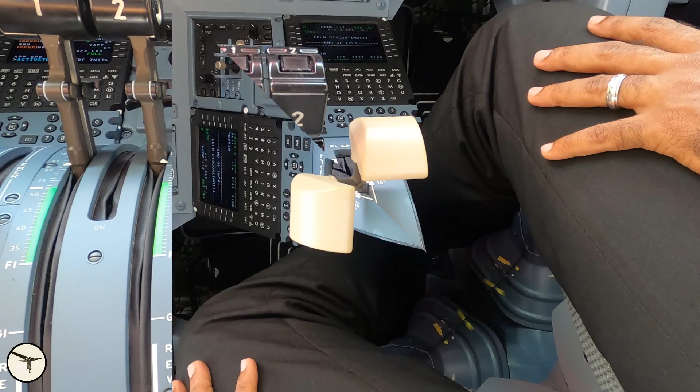The preliminary report for the accident for Yeti Airlines 691 has just arrived, and it's really sad to read the story behind this.

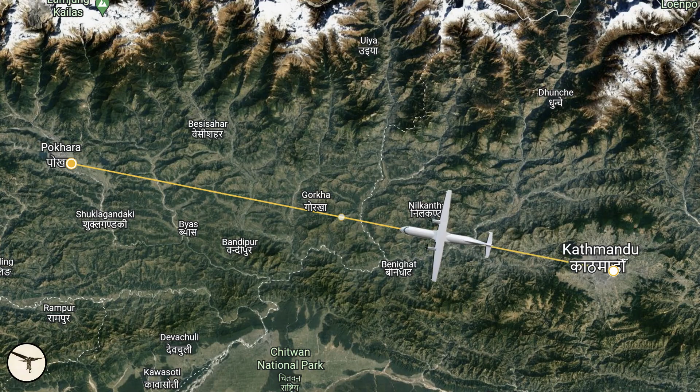The accident happened with Yeti Airlines on 15th of January 2023. This was a flight from Kathmandu to Pokhara airport, a brand new airport opened only 2 weeks before the accident. The old Pokhara airport is located just a few nautical miles to the west of the new airport.

The flight from Kathmandu to Pokhara is very short, and it will be natural to land on runway 30, because that means you will fly straight in.

On this flight there were 2 captains on board. One captain was doing familiarization training. This captain sat in the left seat and was pilot flying. In the right seat was an instructor who was then supervising the flight.

As they got closer to Pokhara and got in contact with the tower, they were told that they will be given an approach to runway 30. But instead they asked for a visual approach to runway 12 in the opposite direction, which was granted.

The weather was very good, very light winds, 3 to 5 knots, good visibility and just a few clouds.

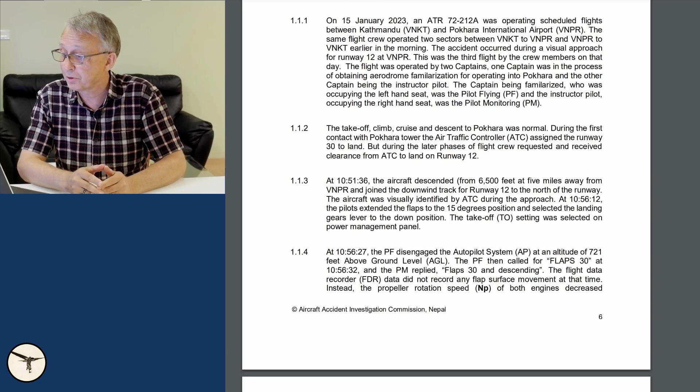According to the report, in section 1.1.3, at 10:56:12 they extended the flaps to 15 degrees position and selected the landing gear down. At 10:56:27 the pilot flying disengaged the autopilot at an altitude of 721 feet above ground level.

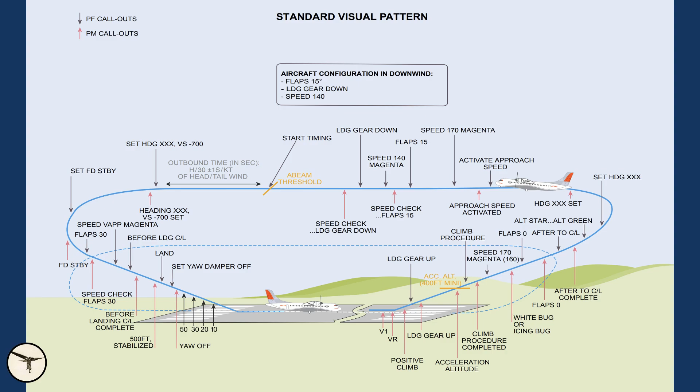Flying a visual approach at this altitude is a bit low, but there might be some reason for it. A standard visual approach is flown at 1500 feet above the airport.

The pilot flying then called for flaps 30 at 10:56:32, and the pilot monitoring replied flaps 30 and descending. The flight data recorder data did not record any flap surface movement at that time.

Instead, the propeller rotation speed, NP, on both engines decreased simultaneously to less than 25%, and the torque started decreasing to 0%, which is consistent with both propellers going into the feathered condition.

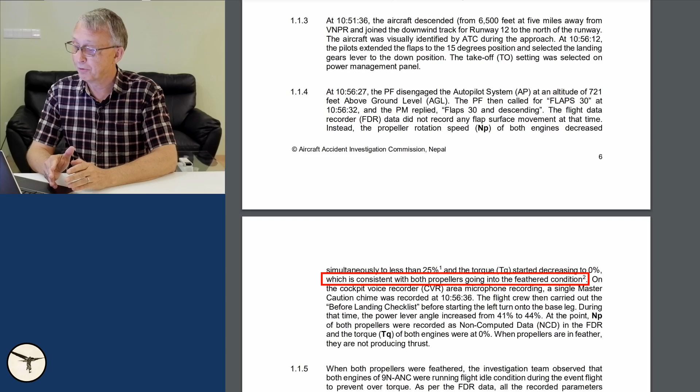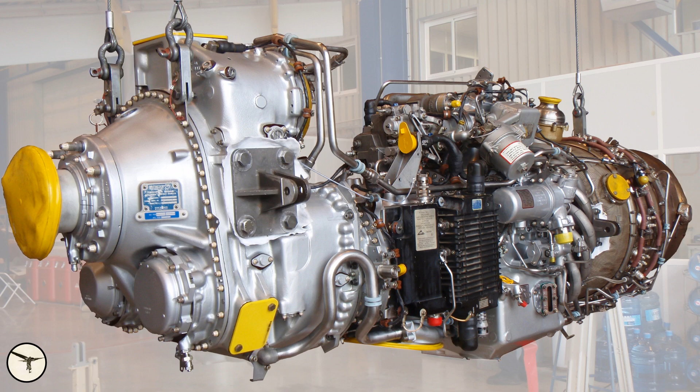The flight data recorder cannot register rotation speed below 25%, which means it can be anything from 25% down to 0%. Before we continue, let me give a brief description of the engine.

If you want to know more about the engine and how it works, you can watch those videos. The core of the engine is a low pressure shaft with a compressor and turbine, and a high pressure shaft with a compressor and turbine.

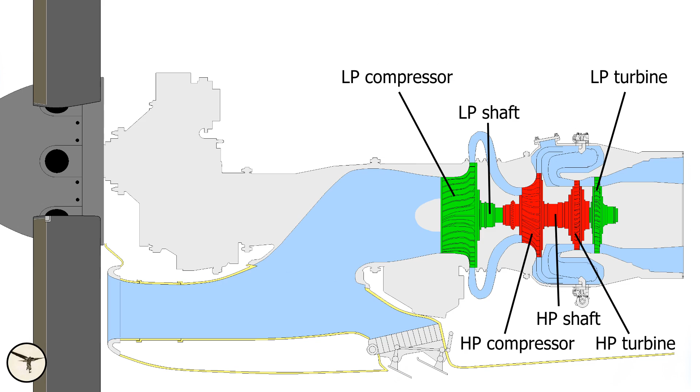Those shafts rotate independently of each other, and the rotation speed is shown as NH and NL. 100% NH is about 40,000 RPM.

The compressors squeeze the air and send it to the combustion chamber, where fuel is mixed with the air and burned. This gives energy to drive the compressors, and we call this a gas turbine.

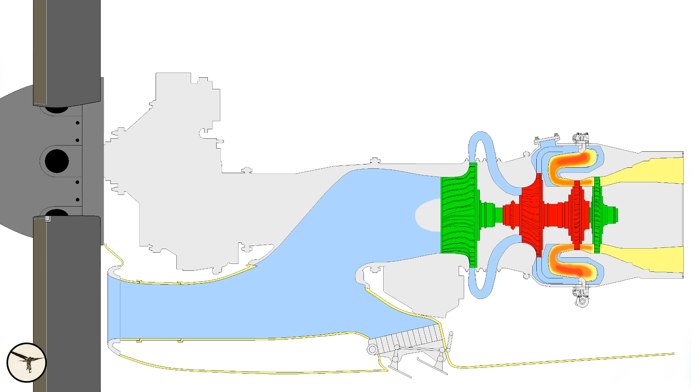The gas turbine drives a DC generator, which provides power to many of the systems in the aircraft. Then we have a third turbine called a free turbine. It is connected to a reduction gearbox and a propeller.

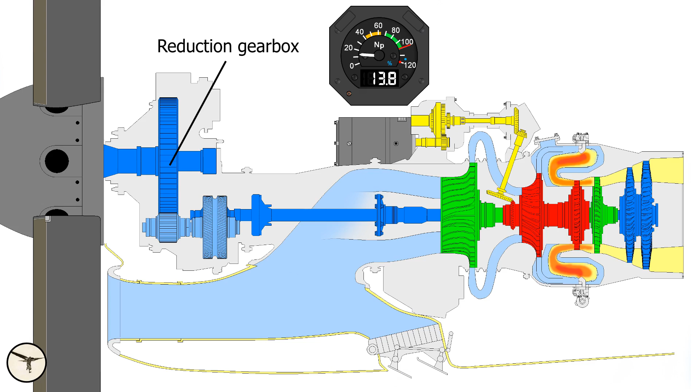The rotation speed is shown as NP, and 100% is 1200 RPM. An AC generator is attached to the gearbox.

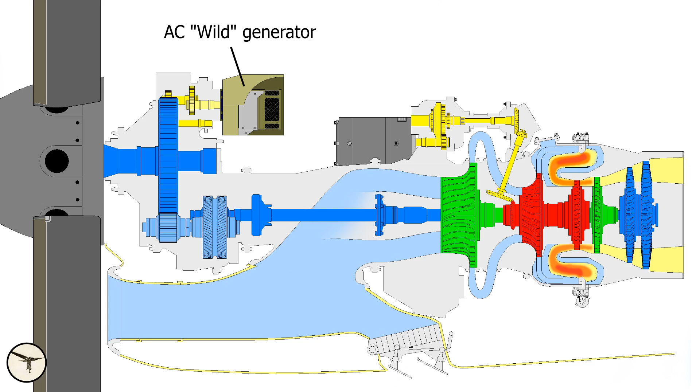Since the propeller rotates with variable RPM, the generator produces AC power with variable frequency. Therefore, the generator is called an AC wild generator. The AC generator is online when NP is more than 65%.

For example, after landing, when we are taxiing in, we will feather the propeller and NP will drop down to about 14%. That means the AC wild generator will go offline.

The torque indicator is the primary indication for the power of the aircraft. The power is defined as torque multiplied by NP.

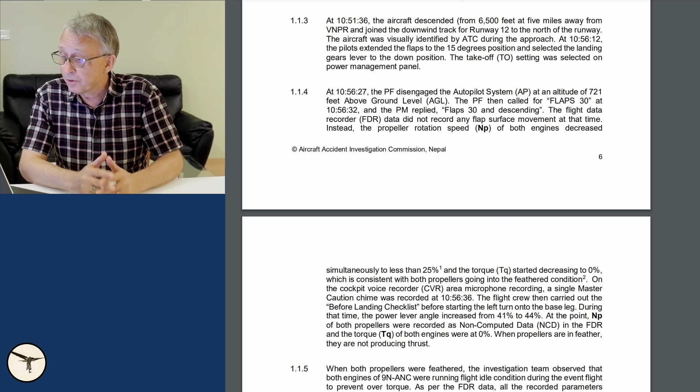On the cockpit voice recorder, the microphone recorded a single master caution chime at 10:56:36. I assume this chime was triggered because the AC wild generators went offline.

Those generators are powering the hydraulic pumps and some ice protection systems like the windshield heating and pitot heat. So they should get 3 alerts on the crew alert panel: for electric, for hydraulic, and for anti-ice.

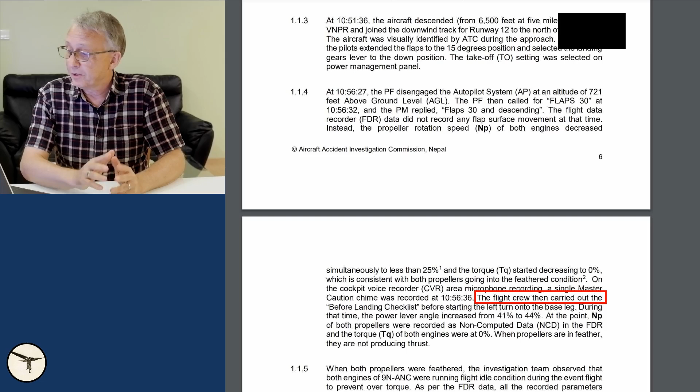The flight crew then carried out the before landing checklist before starting a left turn onto the base leg. On that checklist, you check that you have flap set for landing.

Apparently, both pilots missed that point, which means they didn't check the flap indicator properly, because it should have been at 30, but it was at 15. The report doesn't tell exactly what was said between the pilots. We must have to wait for the final report for this, I assume. It only mentioned a few comments by the pilots, but we don't know exactly what was said.

At 10:56:50, when the radio altitude call out for 500 feet was annunciated, this is an automatic call from the radio altimeter, another click sound was heard.

A click sound can be quite a lot of different things. It can be the movement of a lever, like the flap lever. It can be condition levers. It can be a switch, like the taxi takeoff light switch. So we don't know exactly what that click means.

The pilot flying consulted the pilot monitoring on whether to continue the left turn, and the pilot monitoring replied to continue the turn, which means both pilots had a lot of focus out of the window. It's possible that the flying pilot had never flown this procedure before, since it's a new airport, and this was a flight with an instructor. Which means you have a high workload, because you have to find some landmarks you can use as a reference for later flights. So therefore, I understand why the pilot made this question.

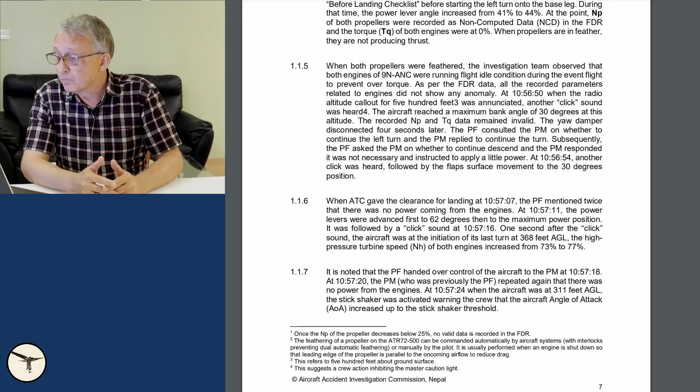At 10:57:11, the power levers were advanced first to 62 degrees and then to maximum power position. It was followed by a click sound at 10:57:16. One second after the click sound, the aircraft was at the initiation of the last turn, that means this turn from base to final, at 368 feet above ground level.

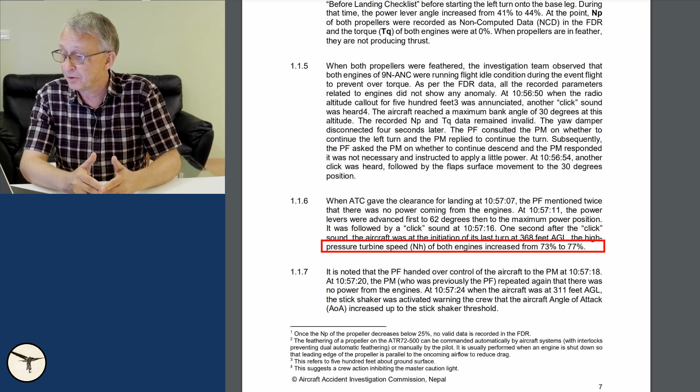The high pressure turbine speed, NH, on both engines increased from 73 to 77%. When the propeller is feathered, the gas turbine continues to run at idle power, and moving the power lever doesn't change that very much. The gas turbine continues to drive the DC generator, which supplies power to all the instruments, so everything appears normal, except for those orders that were already given.

It's a bit strange that they didn't understand what happened. I think the workload must have been too high because of the focus on what's outside the window. And I think pilot flying must have started to struggle to keep the aircraft flying, because without power, you're losing altitude. It is noted that the pilot flying handed over control of the aircraft to pilot monitoring at 10:57:18.

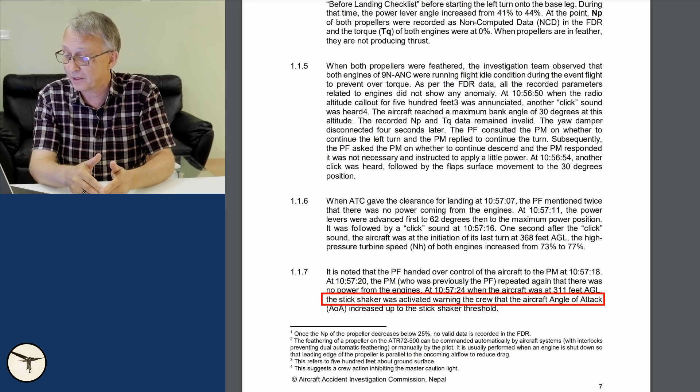2 seconds later, at 10:57:20, the pilot monitoring, who was previously the pilot flying, repeated again that there was no power from the engines. At 10:57:24, when the aircraft was at 311 feet above ground level, the stick shaker was activated, warning the crew that the aircraft angle of attack increased up to the stick shaker threshold. That's an alert before the aircraft is stalled.

And shortly after, the aircraft stalled, the left wing flipped, and the aircraft crashed a few seconds after this. There were 72 people on board, and all of them perished.

The accident report indicates very strongly that both condition levers were moved to feather instead of the flap lever being moved to flap 30. I find it unbelievable that this even could happen, because the flap lever is shaped like a wing, while the condition levers are more squared, and there are two of them. To move the flap lever, you have to put your hand over it, grab one side with the thumb and the other side with the other fingers, lift it up, and then move it.

To move the condition levers, there is a trigger lever underneath each one. You have to put your hand over the condition levers and put two fingers, one on each trigger lever, lift them up, and then you can move the condition lever. It's unbelievable for me that this even could happen.

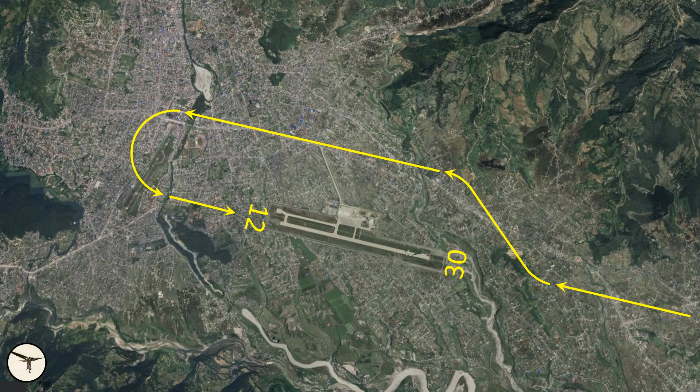The role of the pilot flying is to fly the aircraft. On a visual approach, the airport will be on the flying pilot's side, so the pilot can easily see the runway all the way through the maneuver. But the pilot monitoring will have less visibility towards the airport because this pilot is sitting on the other side. The most important part for pilot monitoring is to monitor the flight speed, altitudes, track, and configuration, and call out if there is anything that is not right.

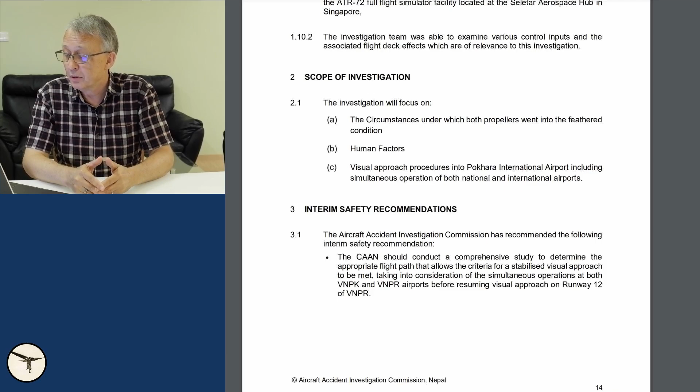Apparently this didn't happen, but as I said, we have to wait for the final report before we can draw the conclusions here. When you read chapter 2 in the report, it says the investigation will focus on A, the circumstances under which both propellers went into the feather condition, and B, human factors.

And yes, human factors will play a very important role in this investigation. The investigators really had to dig into, try to understand what was going on, what was the mindset of the pilots, how did they communicate together, what was the perception they had. Because it's a very, very unique situation here.

I find it unbelievable that this even could happen. So I hope the investigators really can dig so deep that they really can find the root cause, whatever it is. If this is related to company culture or individual culture, I hope they will find it out.

It's very, very sad, and it's terrible for all involved, especially the relatives and friends of those who are deceased. They deserve the best possible investigation and an honest review of everything.